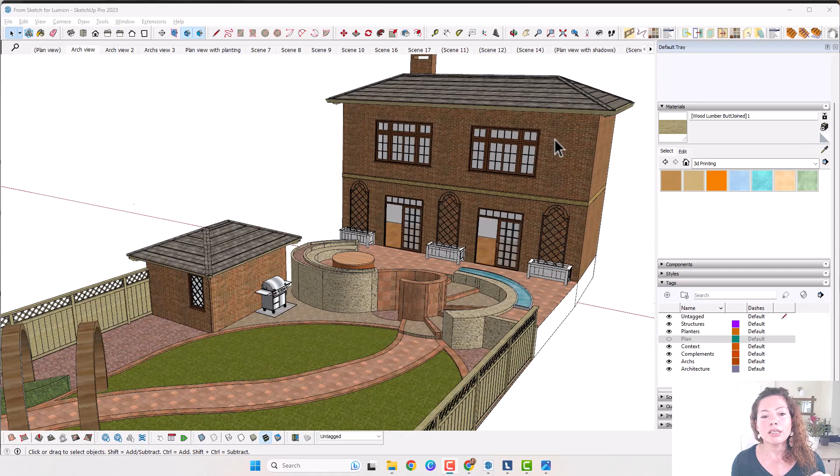Tip number 1 is have attention to detail in terms of architecture and elements. As a garden designer or landscape architect you're much more worried about your garden, the planting, and your actual layout. But if you want amazing renderings once you're inside Lumion, the level of detail you add to the actual architecture, to the windows for example, is really important to make sure your renderings are as realistic as possible.

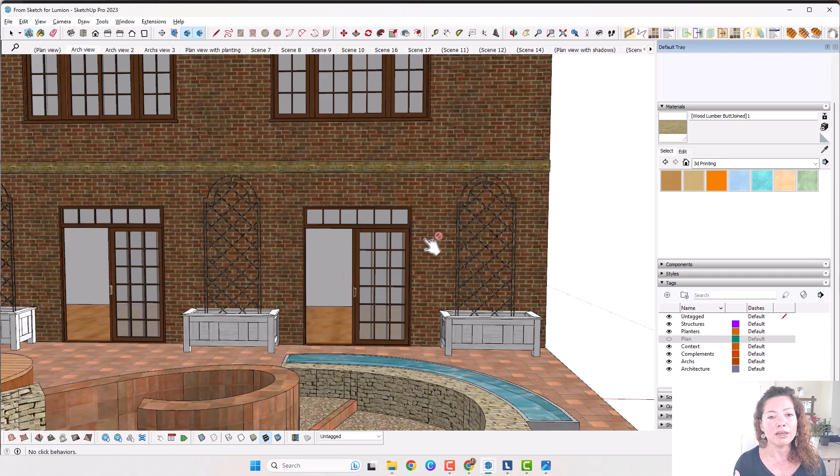Add, for example, a pavement to the indoors, even a living room setting inside, once you have a close relationship between indoors and outdoors. Also have as much level of detail as you can on roofs. I used to do roofs really simple, just to have a roof in place, but when I started adding more detail to the roof it completely changed the overlook of my renderings.

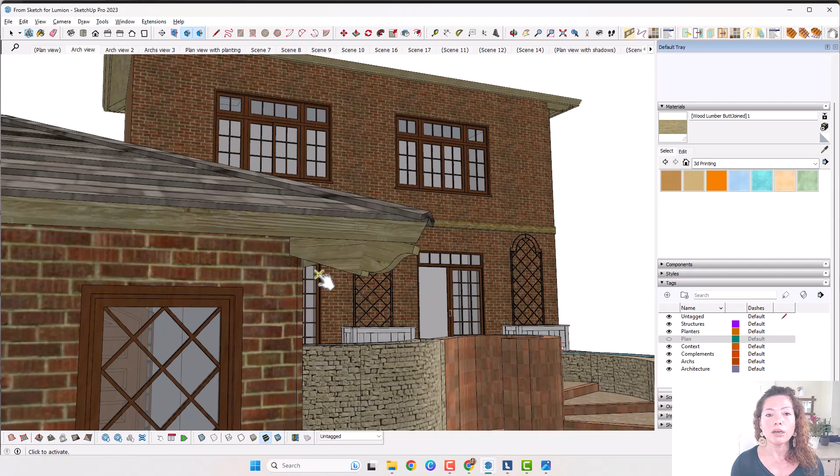That's tip number 1. Tip number 2: actually have your layout in place. Make sure all the textures are added as you want inside SketchUp.

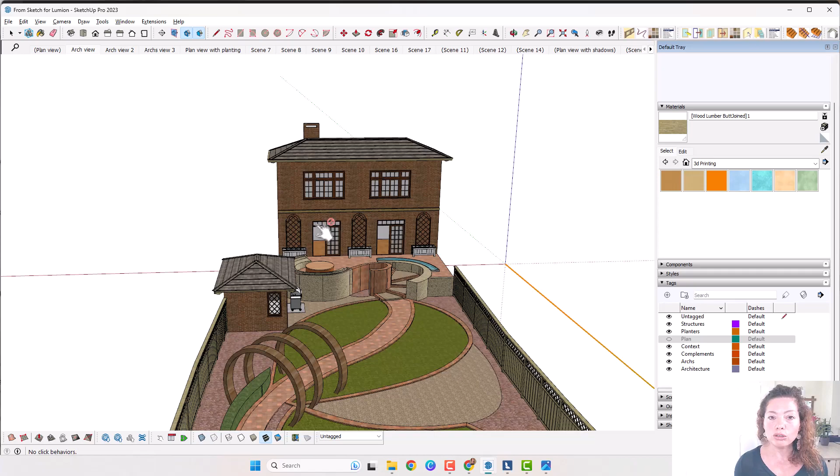It doesn't need to be the specific textures you want, you can change them inside Lumion, but make sure all the different materials, all the different areas with different materials, are applied inside SketchUp so you can differentiate them easily once you're inside Lumion. So all the grasses, for example, even these small edges here where I'm going to add a 3D leaf texture when I'm in Lumion - make sure all this is done inside SketchUp.

Tip number 3: all the layout and topography should be worked inside SketchUp. There is no place in Lumion to actually do any land modeling at all. You have some tools inside Lumion, but technically they're not specific - you can't really work like you do in SketchUp.

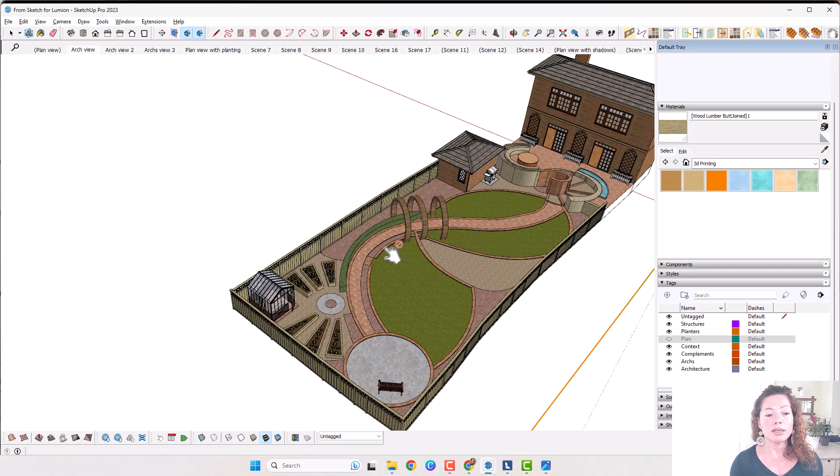Maybe you can use those tools more for context, or if you want to create a river passing through your property or the neighboring property, you can do that in Lumion. But if you really want to be specific, any topography, any hard modeling needs to be done inside SketchUp before you move into Lumion.

That's really important. Tip number 4 is actually have your model organized in layers, especially if it's a big project with a lot of context - imagine it's an urban area with a lot of neighboring buildings. Have that tagged in layers inside SketchUp so you can easily hide or show depending on how you want once you're in Lumion.

It's really easy to show and hide some SketchUp layers and just refresh your model in Lumion. Things like structures, planters, context, complements, arches, architecture - anything that's going to make your model really heavy that you might want to hide. For example, if I want to hide the architectural elements, I might want to do renderings showing just my layout. It's important to have that inside SketchUp so I can quickly hide and refresh my model once I'm in Lumion.

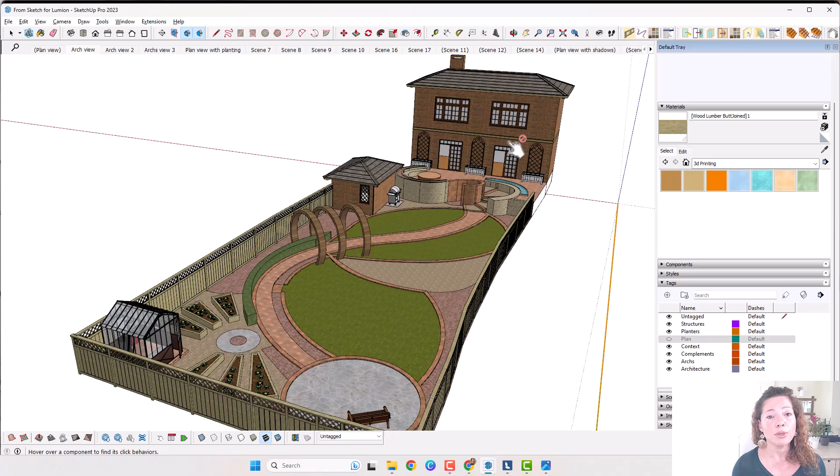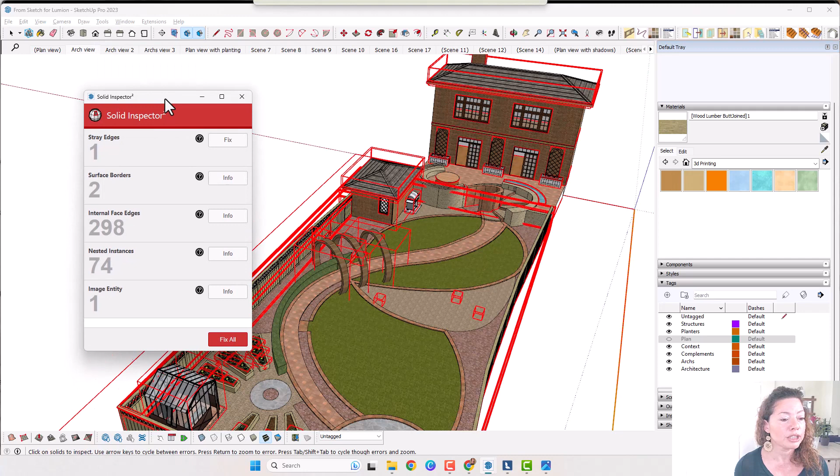Tip number 5 is actually clean up your model. Any weird geometry, any flickering textures - when you have two faces glued together it's going to flicker inside Lumion, so have that fixed before you import your model into Lumion. Tools like Solid Inspector are pretty cool to help fix some specific geometries to make sure they're all ready to go.

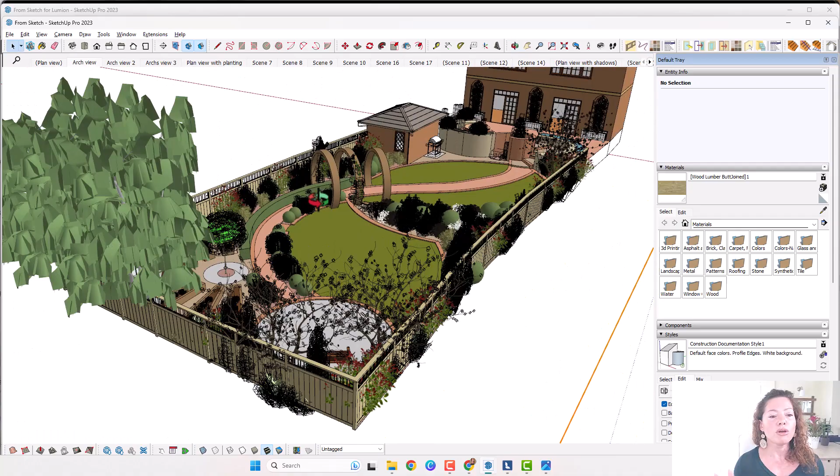Make sure all your planting is gone. Normally, if you're just working with SketchUp, you'd have your model full of the planting you want and everything looks nice and amazing - but that's if you're using just SketchUp.

If you want to use a program like Lumion, I really suggest you take all the planting out. Even if you're using 3D Warehouse planting, import them as separate models once inside the program, because they are very high geometry models with a lot of polygons and detail - that's something to be concerned about.

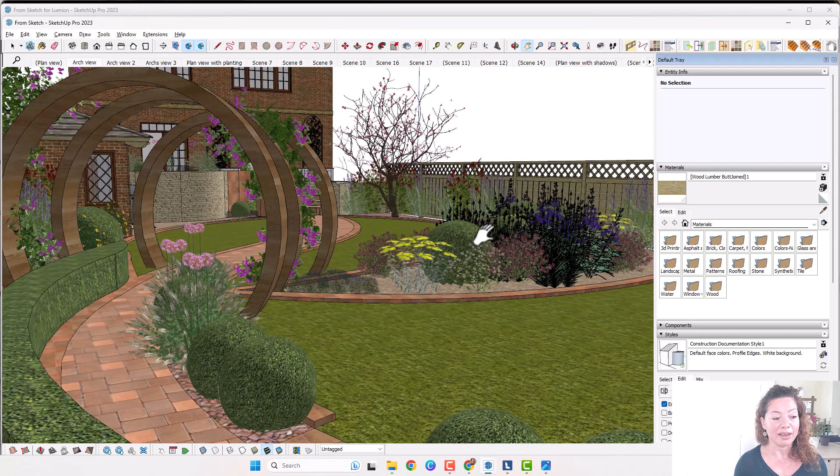When you download any planting from the 3D Warehouse, be very concerned about how heavy they are, how much geometry they have, because once you're inside SketchUp or Lumion and adding a lot of planting, it gets heavier and heavier. So take all the planting out.

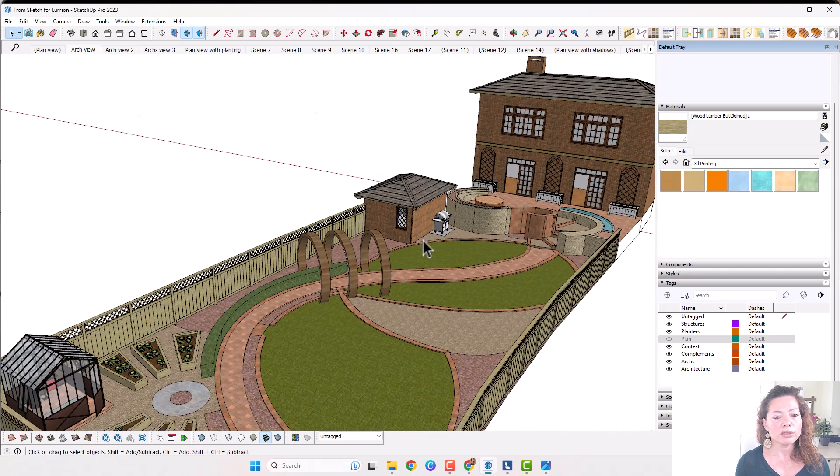All the planting is going to be done in Lumion, even if it's a 3D Warehouse model. So all you want is your model as clean as possible, geometry-wise. All I have here are some lettuces already in place in my vegetable planters. Have the model clean and ready to go inside Lumion.